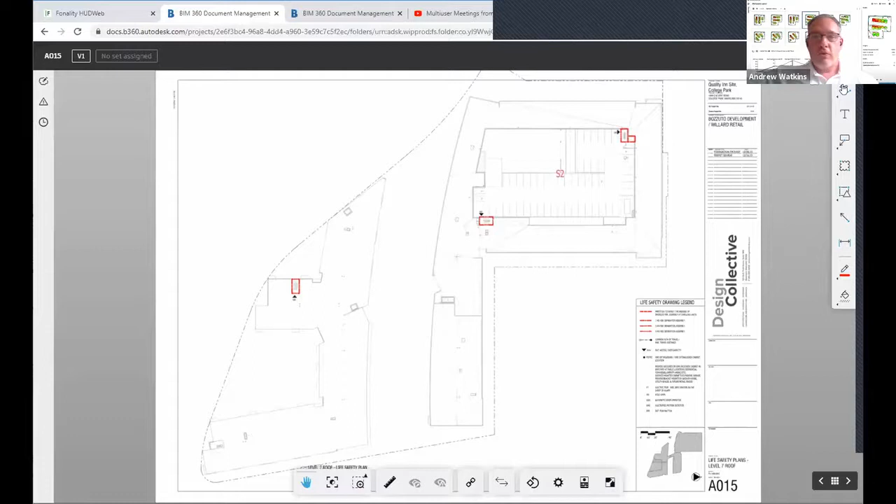But here we are. Here's the markup tools for a sheet in BIM360. Over here on the right side you see a set of tools. For those of us used to either Adobe or Bluebeam, these are a little bit lacking in what we like to do and how we mark up. So you do a little sketch tool and you can kind of scribble, or you can put a cloud around something and put some text with it.

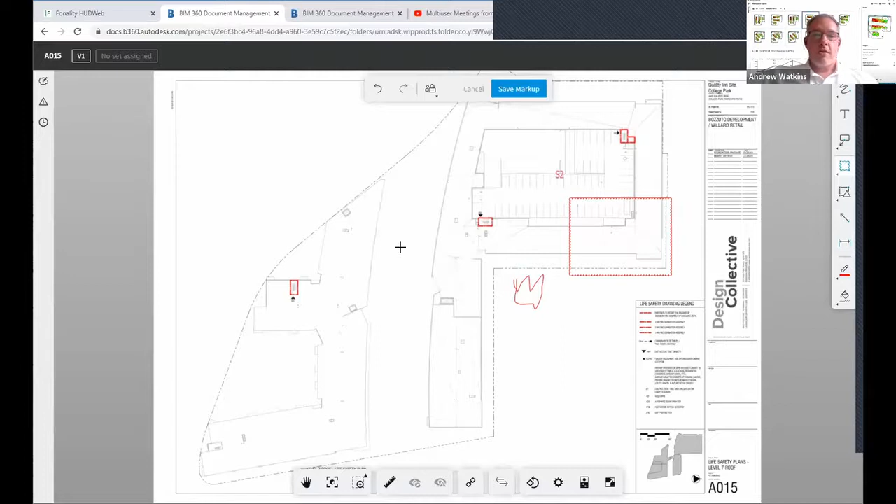But it's a little bit rudimentary, and I think while yes, this can be shared out to contractors, to clients, or just your internal team, depending on your permission sets, the markup tools within BIM360 are not awesome in terms of drawing markup.

Most likely we've seen Autodesk has definitely been making lots of changes. We might see a name change, yes, but hopefully we'll see some more functionality. We talked about that last time — like every time you open BIM360, there's a new thing that opens up, like the scheduled publish of drawings or models I didn't even know existed until that was brought up last time.

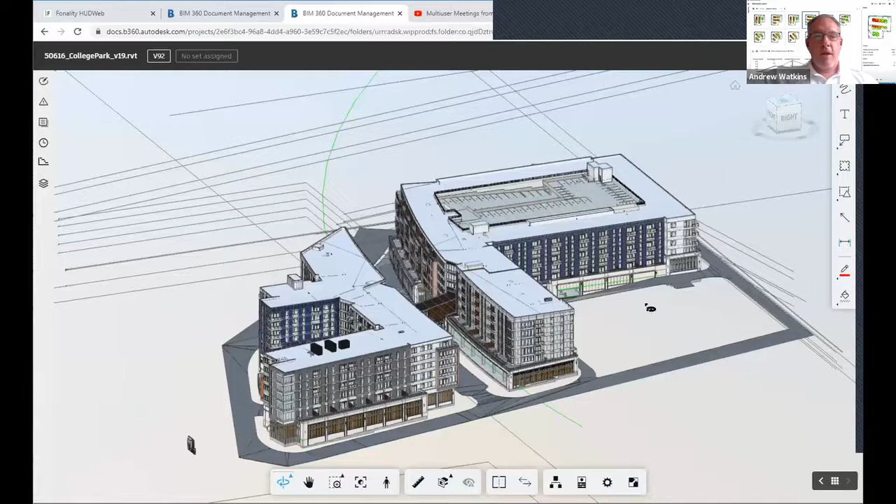So that's been fun. But what I'd really like is the 3D markup tools and review capabilities. Super simple viewer, easy to orbit, easy to drop a little guy in here, and then you go to the street view version.

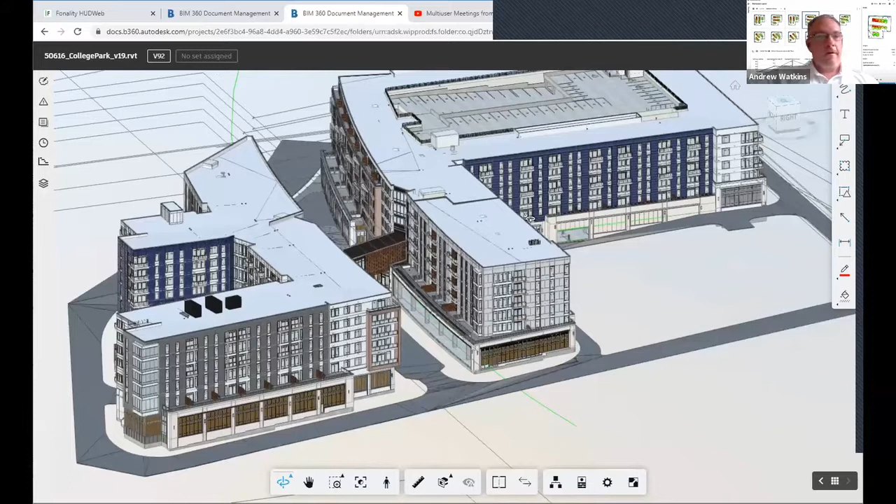You can use these same markup tools right within this viewer. So you open your little markups panel on the left side, click on the markup, and it jumps right to it. Now I'm wondering why do I have bronze glass in this facade here? That was an interesting way to kind of pull up and question what's going on with the design at that current time. Anybody who has access to your project can make these different comments, so it's a great way to track revisions and look at comments as they are progressing.

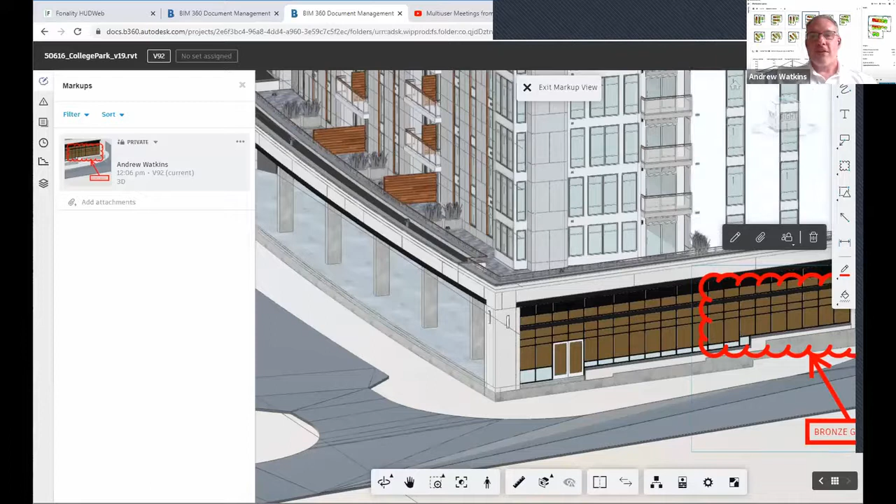As someone who hasn't used this side of BIM360 docs, how do we get to this? Because once again that website is so tricky, right? Yes, so if we're in the web interface, go up to this little 9-square icon here, and we're at document management, and oh, now we're restarting. That's good, there we go — always good for a refresh.

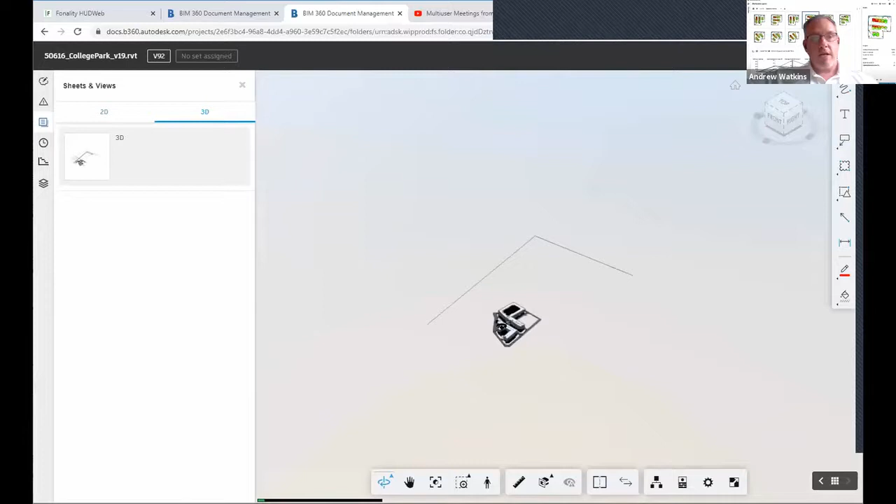Go into your project folders, and depending on the model you want to open, you just select the discipline — that's how we break up the models into different folders. Then just select the model you want to open, and up comes either your 2D views that you've published out or your 3D model view. Look at all those fun 3D level lines that are cropping up now.

And it publishes - this is a 500 megabyte model, so it's pretty significant, but it publishes out and opens up in the viewer pretty quickly.

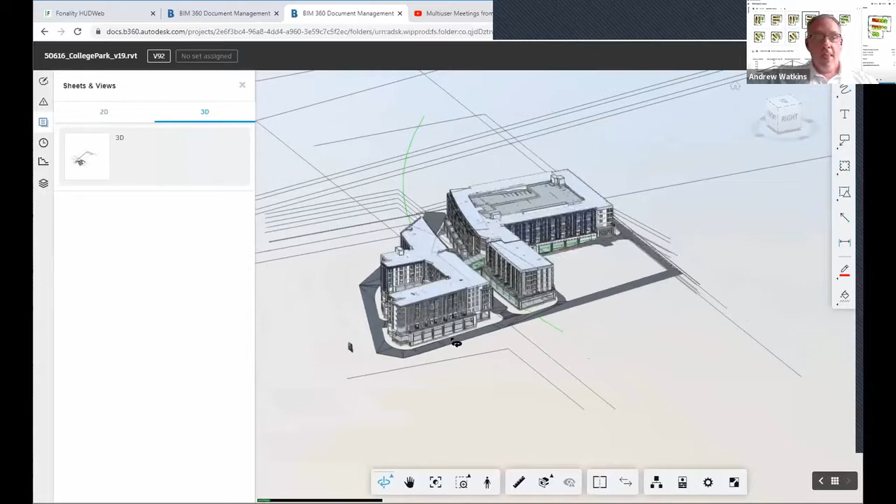We have a few questions coming in, particularly about the web version of BIM360 documents. That's where we only see the published model, right? So you need to publish your model if you want to see the latest and greatest.

Awesome, and fun side fact, you can see all of the versions of that model, and you can open up different past or future versions and compare the changes between the two. Not going to demonstrate all that right now, but it's a good way to track the model history.

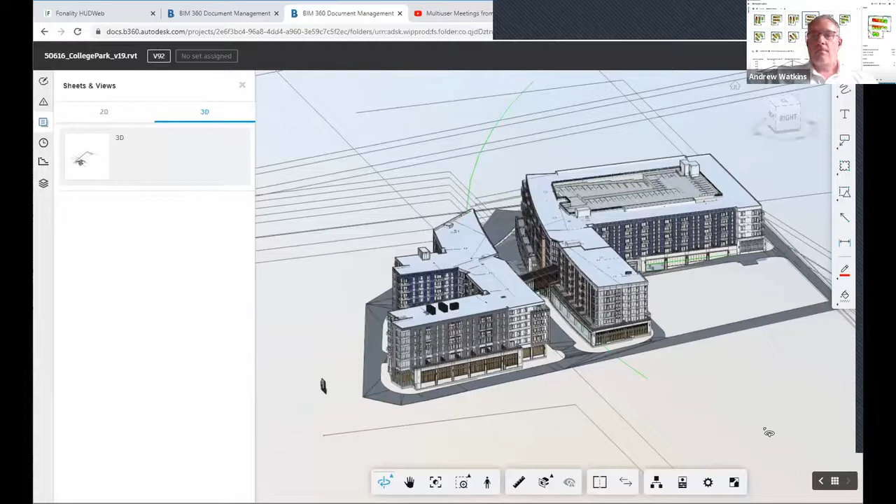Can we save 3D views from the Revit model and have them available here to be viewed? So if we wanted specific areas, maybe lobbies or what have you that we're coordinating in - yep, definitely, you can crop those and add them to the views you want to publish. So you can publish any sheets, any views from your model, from your project browser, and they will appear here for public consumption.

That's fantastic. And like you said, Andrew, this is something a lot of us have, if not within the last year, definitely within the last 3 to 6 months, already been using this platform. So if we can have it all integrated with the permissions already set up and all of that good stuff, why not?

Right, so as I said, it's a great tool, but it does have some limitations, especially from the AEC markup and review standpoint - things like the ability to save comments as a tool chest you use frequently, like when you're doing a punch list, things that Bluebeam has built into it.

So if it's okay, I'm going to switch over to Bluebeam. It's here somewhere. While you do that, it looks like we're up to about 90 plus people.

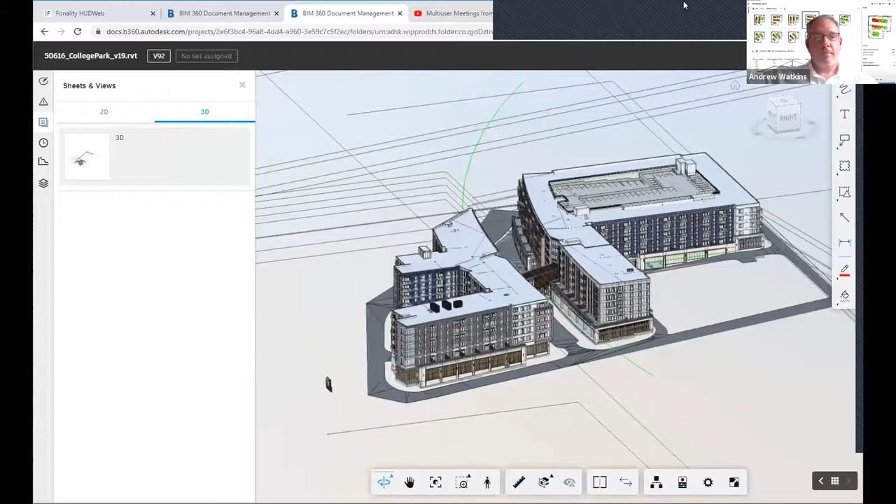So I just want to see where everyone is coming from today. If you could go ahead and fill out that poll in front of you, let us know where you're coming from. Oh, I like seeing the numbers on Washington D.C. go up, we didn't have any last time. This is awesome, we'll give you a few more seconds. I think some people just put Washington D.C. to appease me - it just shot up.

Alrighty, so we'll share the results here. Looks like we have the majority in Maryland, Virginia, and North Carolina, but definitely some representation in Pennsylvania, Washington D.C., South Carolina, and some other states not listed. We'd love to see in the chat where you're coming from outside the USA or outside the states listed. So thank you guys so much. And who is outside the U.S.? I know, I want to see. Two people - look at that, yeah, that's awesome. Cool.

All right, so Bluebeam is definitely, as we saw, 75%, 3/4 of us are in there using that. So real quickly, I'm in Bluebeam Studio - that's the little house icon over here.

And there's a difference between projects and sessions. Projects is one person marking up at a time. Sessions is multiple people marking up at a time - that's the simplest clarification between the two. And what I love about sessions is I can invite up to 500 people to mark up something at once. You get this stream of consciousness of what is happening, who is marking up what and when, so you can really see who's in it at the current time, and what they have marked up and looked at as they've gone through.

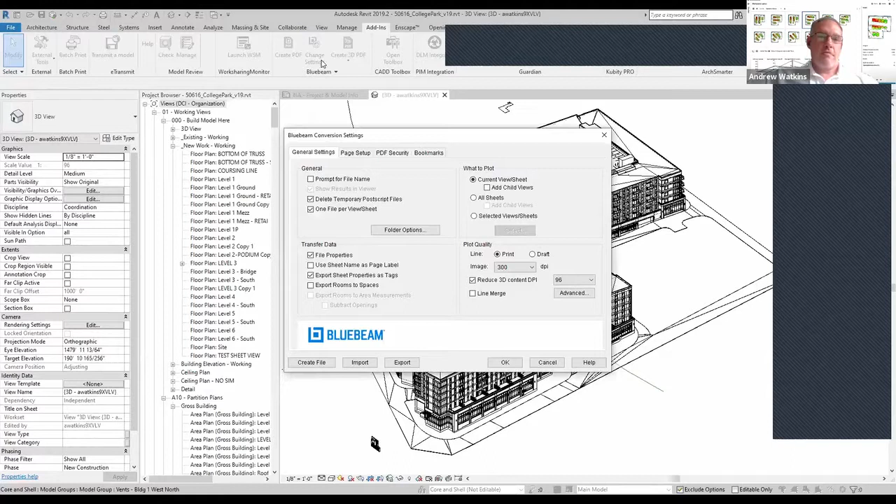Yeah, here I'll share that for everybody. So here's our Revit add-in, and here we got the Bluebeam add-in for Revit, and you see there the Create 3D PDF right next to it. Over here is the Bookmarks tab, and if I just click that for drawing, it will now just name all of your sheets by the drawing name, so you don't have to do any renaming later in Bluebeam, although that's really easy too, but so that's a super useful feature as well.

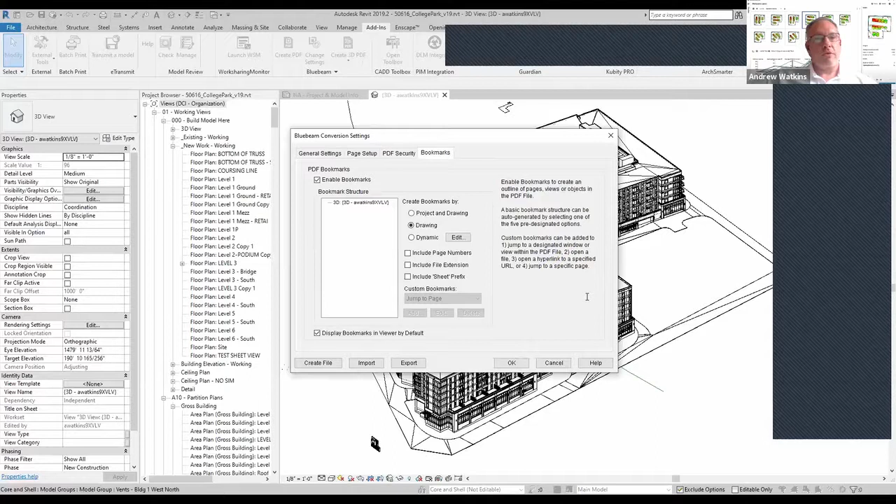Absolutely. Well, thanks Andrew. Any final thoughts about how your firm has changed in terms of reviewing projects and collaborating?

Yeah, I wanted to touch on VR just a little bit, not to do a huge diversion, but we've been using a tool called Iris VR. I don't know if anybody else is using that at all, but it's pretty cool in that it lets you export a model like this out to the cloud, and then you can invite other users into it.

So you do effectively a multi-user VR review. You get a little avatar, you're all standing around the model or inside the model, depending, and you're all looking at the same thing.

You can divert people's attention right to a specific thing to look at, and it really has become a great design collaboration tool, especially for all of us. We have designers in Chicago and clients in Florida, and it becomes a great way to, especially with Oculus Quest now being able to handle these models, do this in a really fairly cost-effective way.

Absolutely. Iris has been around for a while. They're, excuse me, yep.

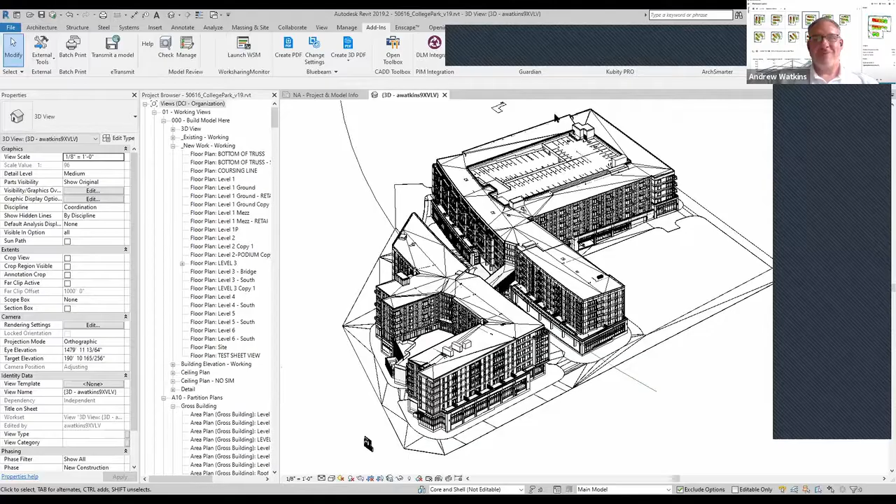Some commenting tools are free right now. I'm sure that won't be the case for long. They want to sell you on it, make it a must-have, and then they want to charge you for it. Absolutely, per usual.

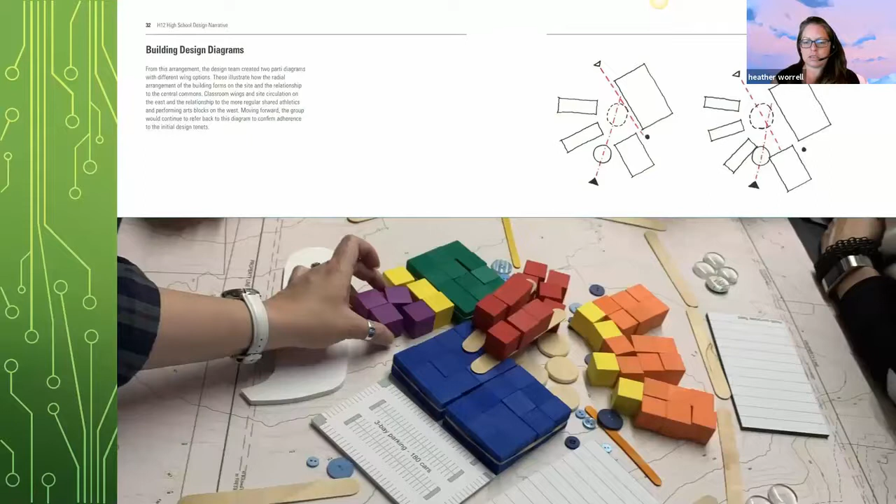And then we had to move online, showing our clients all this information online. Some of the stuff was in SketchUp, so we found that as a tool to very easily let them see different color blocking. During schematic design, we're still using SketchUp quite a bit for this live design process. Of course, we would like it to be more integrated with Autodesk, but our users are still a little bit hesitant to use some of those tools.

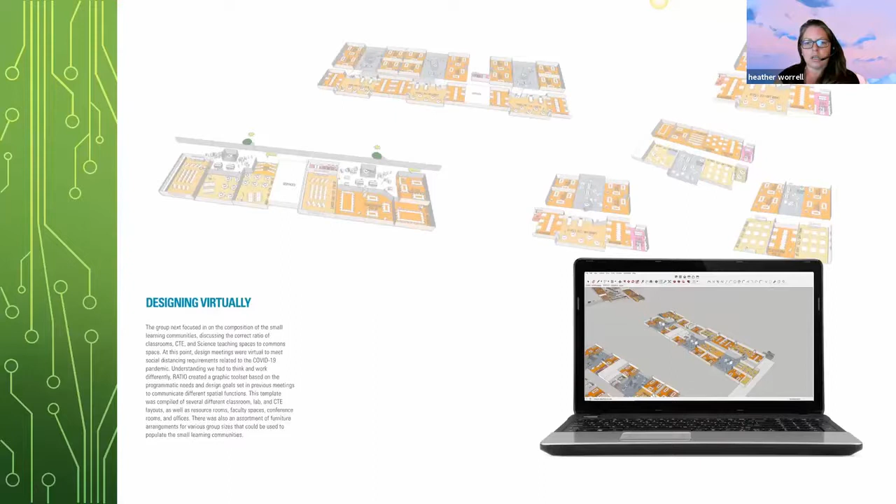So that's what all those are. And then these graphic meeting minutes were required to present as part of this design narrative to the school system. They're pretty tech savvy, and a savvy client in general.

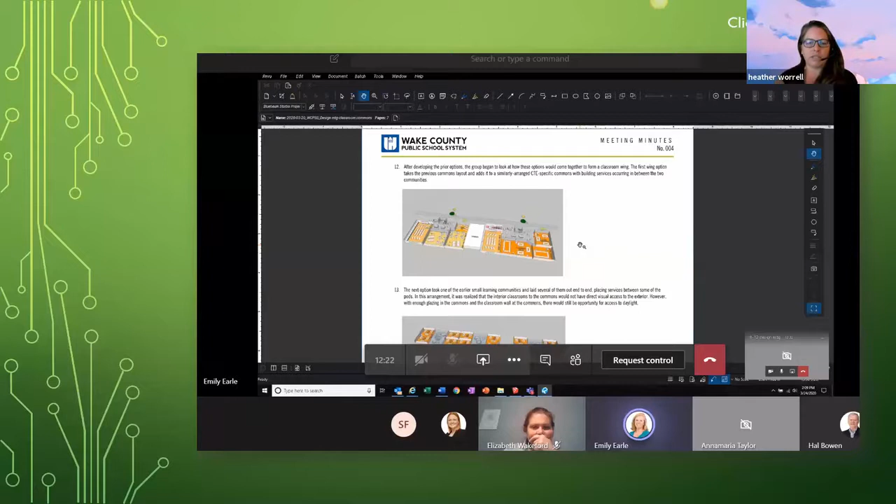So there's that. And then internally, for how we do documentation review, this is more on the construction documents side, doing technical reviews.

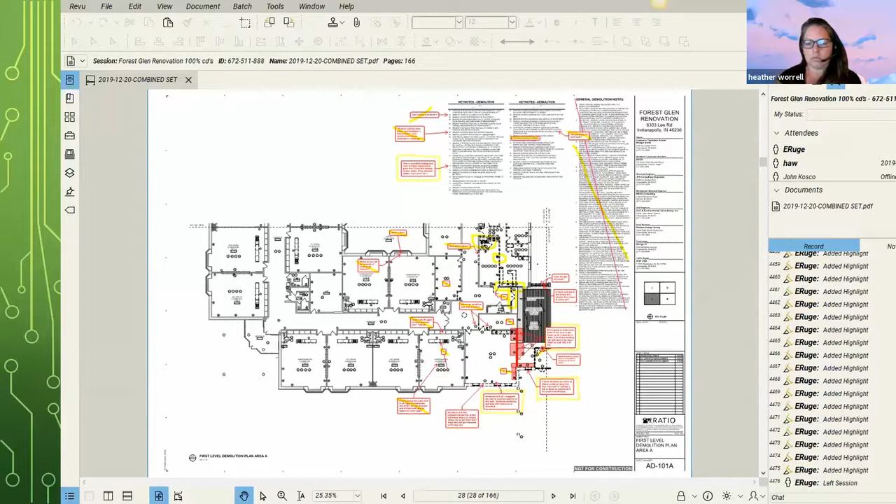We are using Bluebeam. That's just one area that we're continuing to evolve. And then we started using forms to make a technical review summary.

We have a whole bunch of other documents that our technical reviewers use, but this is kind of just the summary of where things are with the project. And then on the back end of that, these are forms within the Microsoft Office suite.

We can start to get information about what we need to train our own personnel on. We've just started this, so obviously we don't have a lot of comments in here yet, but I imagine we'll start to see a lot more data coming through those forms.

And for that same client, we do have some client mandated review tools. Wake County Schools requires this - they set up the Bluebeam session and invite everybody to it. They have a whole bunch of people on their side reviewing and providing markups, and we have to respond to those.

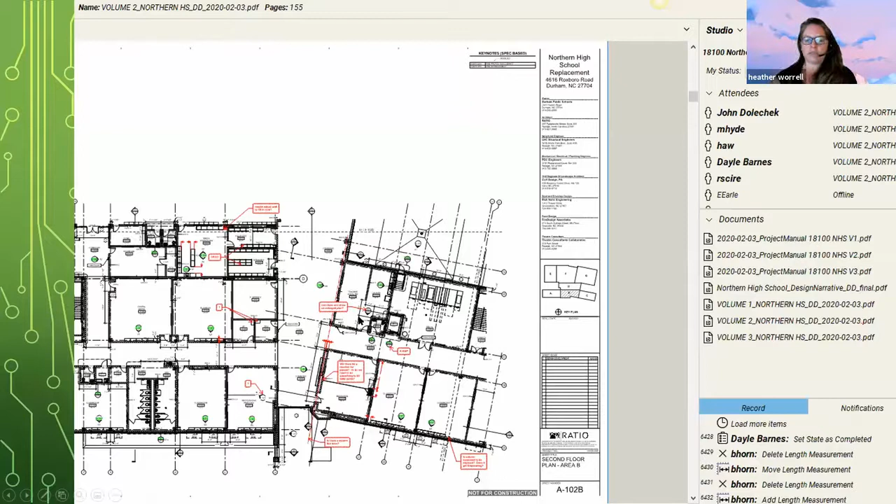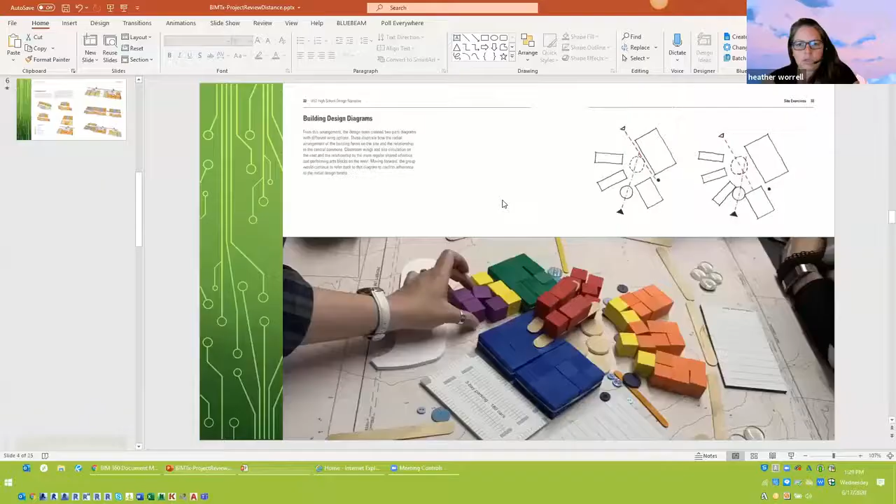And then, for BIM360, this is probably where I want to spend more time. We had a pretty large project, this convention center project, that just got moved onto BIM360, and we have our whole project team.

It's quite a large project team - we have 2 engineering firms for each of the engineering groups, a number of interior designers, a few architecture firms. So we have to get everybody on board, and why not?

I was like, well, let's try and use the review tools within BIM360 to review our documents. We did have some people who were not happy about it - they didn't want to learn new things.

But the main thing I really like about it is that the backgrounds are staying updated. So each week, as you do your documentation and create a new set, you can have all your different models published with all the 2D views you want. You can put PDFs, and these are all PDFs here.

But if we come down to our different files somewhere in here - this is still a bit rough - these are all of our files that we have in the project.

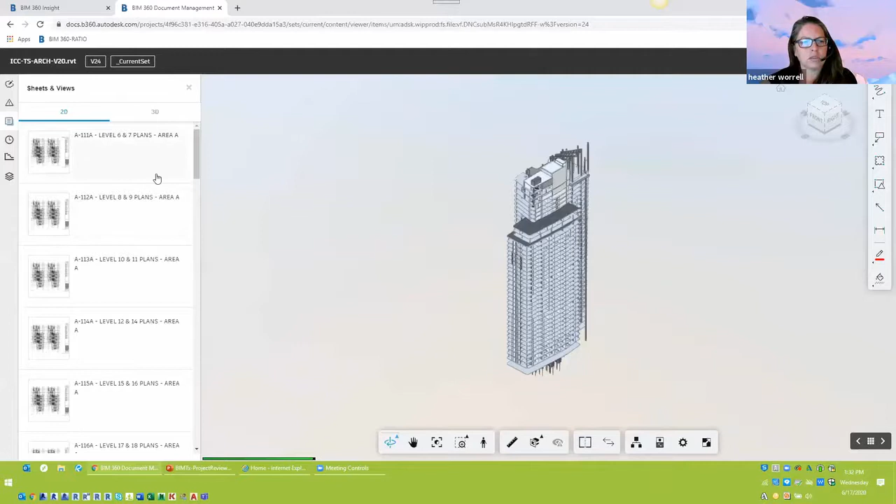And then you can do the same thing over here with your markups. There was a question in the chat before I got on about the difference between markups and issues - issues is this warning symbol over here, markups are the markup symbol.

Within that, one thing with markups is that you can't assign those to anybody, unless somebody tells me different - but Autodesk told me that, so I wouldn't be surprised if they don't know.

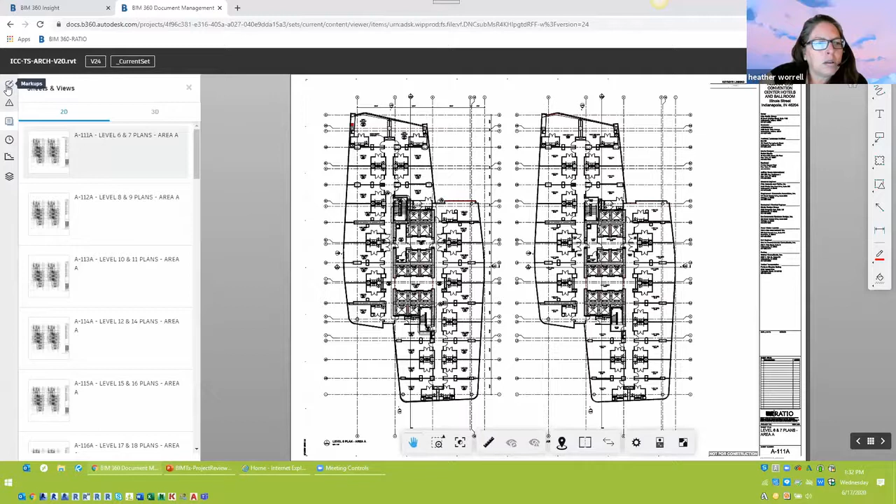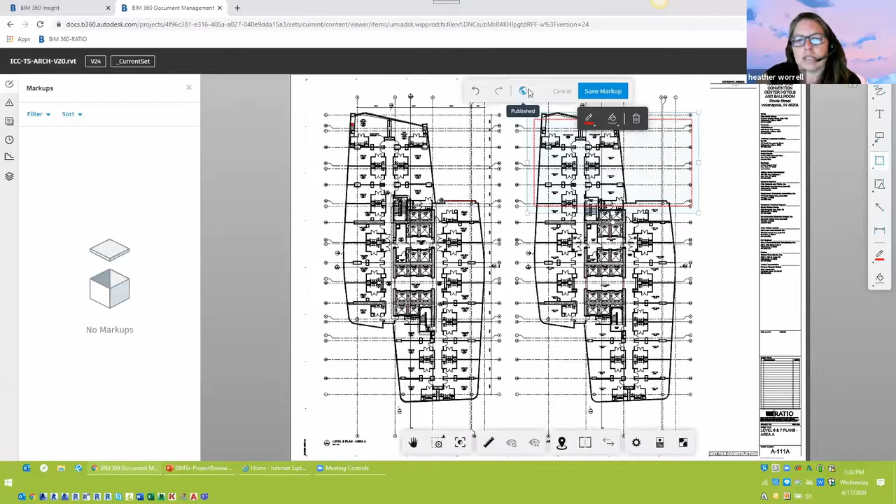So the markup's not assignable, and even when you're making a markup in here, you'll notice there's this private thing. So this markup is just for you. I don't know why that's super valuable, but you always have to come in here and set it to published. There's another thing called reviews, which I haven't done yet - it just seemed like one more step I didn't want to make everybody take. So it has to be made public so everybody can see it. So that's done, you can see that it's published.

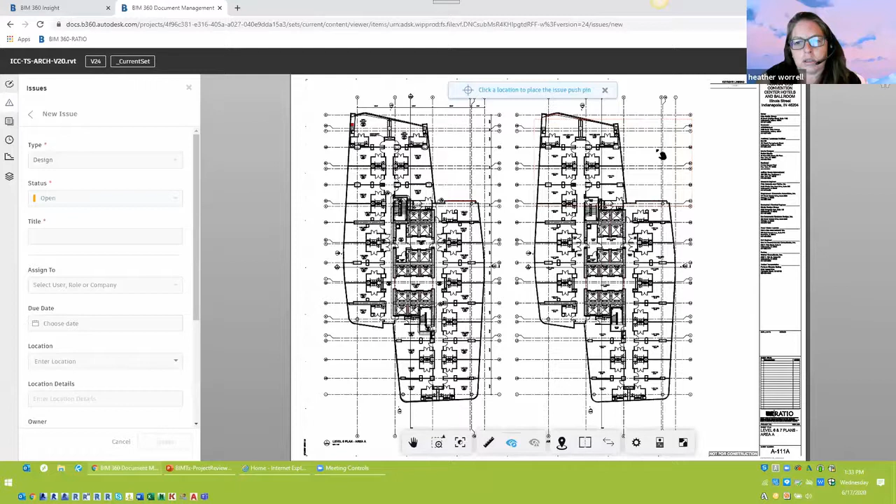The issues is a separate thing. So what I've been telling people is that if you make a markup on a sheet and you want somebody to be assigned to it to go fix it, then you have to make an issue to match that markup. So it's a little bit of double work that you have to do - it's unfortunate, but it is what it is.

Any questions? Any questions come up? Doesn't look like it. No? Okay, alright.

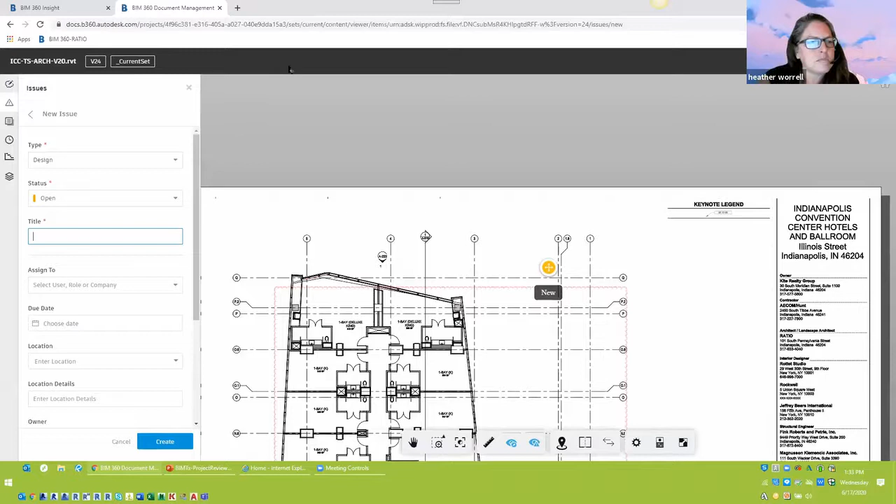So there's that. The other thing I found within document management - so we have the sets, those sheets are coming directly from your project file, and then you can upload PDFs into this - they call it plans, for whatever bizarre reason. So I've renamed that to make it more understandable, but kept the weird 'plans' name in there.

Does anybody know why they called it plans? It's so bizarre. I know there's also ways with the BIM360 project creation that you can create templates, which might help, especially for those of us having to create dozens of projects every day. That will definitely help, because setting these folders up, especially after the fact, can be extremely tedious.

I know there might be some Forge apps and different things like that for those of you who are - yep, there you go, you see it, the ratio template. That will definitely get you a lot of that started and get a lot of those naming things consistent, which helps.

Yeah, it does look like we have a question. We have a question from, I don't want to mispronounce the name, Achieva from North Carolina, asking can you explain background? Oh, the background - so it's literally the background information of your drawing.